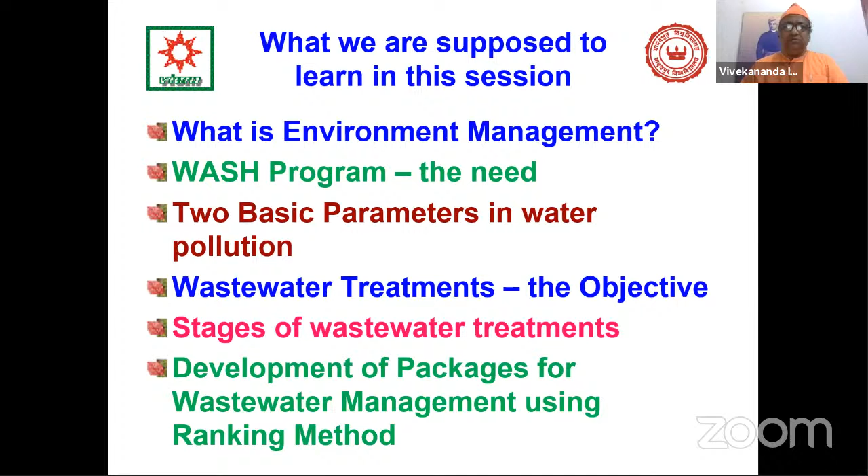So what is environment management? In our webinar internship program, one part is environment management, one part is safety, one part is health. So this is just an introduction.

Man is forced to preserve the environment with the help of science and through legislation, both for his own survival and for the good of the planet in which he lives. Science proposes to educate man on the method of keeping environment clean by reducing pollution, cleaning the effluents, recycling of non-biodegradable products, and looking for cleaner technology. Legislation imposes standards to be maintained and imposes penalty for any violation.

So basically there are two aspects. That's why we specifically used two colors: reducing pollution, cleaning effluents, recycling non-biodegradable products, and looking for cleaner technology are the four avenues where we should use science and technology. Legislation is where we should impose administrative issues, which we will discuss.

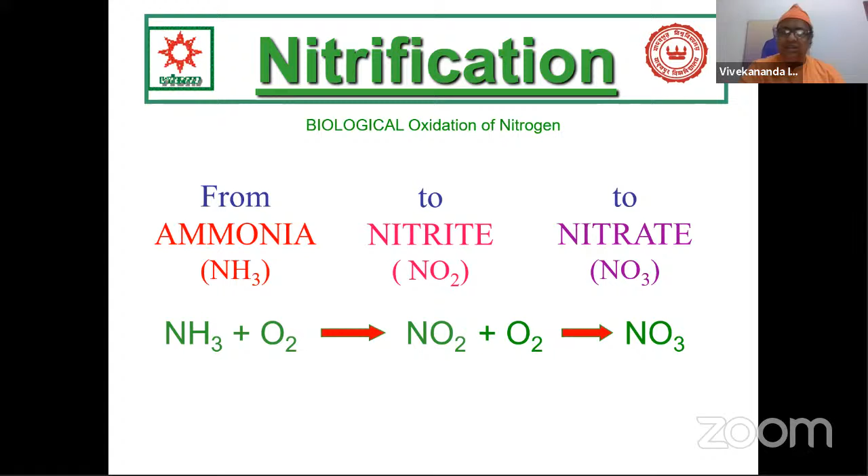Also, whatever the body contains, the ammonia, that ammonia also requires oxygen. This is actually a biochemical reaction. Those who have studied chemistry or chemical engineering have seen that otherwise this reaction will not proceed. The ammonia and oxygen will react either using some catalyst or using some bacteria. That is the slow biochemical process we are considering here.

So this is the reason for DO analysis, dissolved oxygen analysis. This is used in BOD analysis. BOD is known as biological or biochemical oxygen demand. Why is BOD, that biochemical oxygen demand, an essential parameter? I told you we will discuss two parameters: one is DO, the other is BOD.

There are several treatment processes, and basically the goal for all such treatment processes is to reduce BOD to the desired level as specified by the CPCB, the Central Pollution Control Board, which is BOD 30 or less. That is if you discharge it to inland surface water. So that is the standard limit for that.

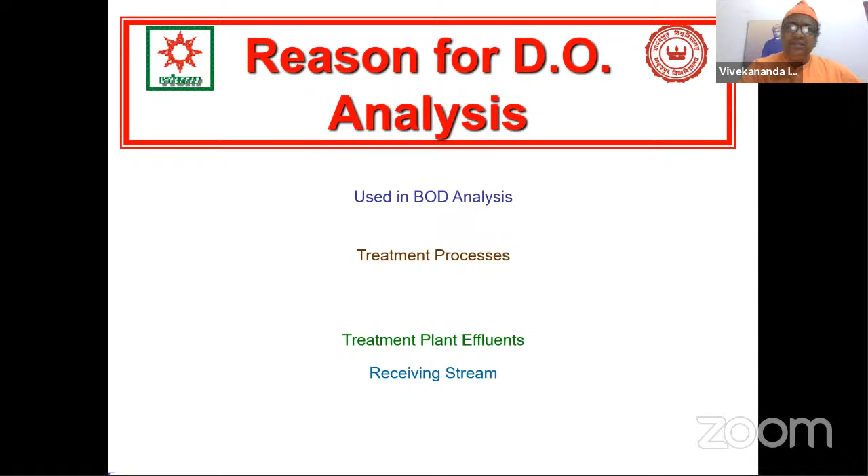Naturally, for treatment plant effluents and also receiving streams, everywhere we have to analyze DO. So unless we know the procedure of DO analysis, we cannot develop the package. This is the precondition for studying this particular topic of my lecture.

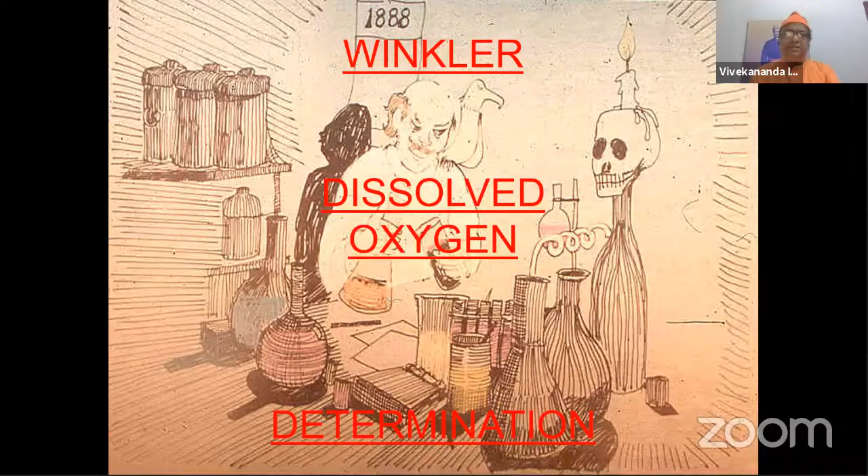Now this is Winkler modification. Winkler did it. Winkler was a chemist in 1888. Winkler found that if you want to find dissolved oxygen in wastewater, the oxygen is actually taken by the biomass, but you have to fix oxygen at certain points, and that's why he used azide.

This is a cartoon showing the nitrite present there, and this is the azide. So as if azide is fighting with nitrite, azide destroys nitrite. That means we have to use sodium or potassium azide for this determination. Sodium or potassium azide is highly reactive, and that's why it is highly explosive.

When my students work in the laboratory, I always caution them that they should be very careful regarding the use of azide, because that may cause explosion. So that is the case.

Now this is the procedure for BOD analysis, the DO analysis. From DO analysis, we have to find out BOD. This is the typical BOD bottle. Each BOD bottle has a unique number, so you can list that number in your record book where you keep the record of your investigation, so it will not mix up with other work, because all these things have to be incubated in a particular incubator known as the BOD incubator. After filling up with wastewater or whatever water whose DO you have to determine...

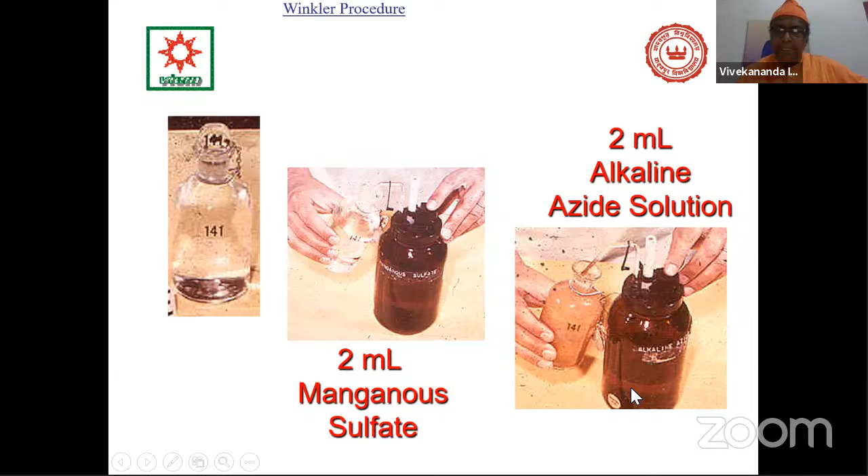Then you have to put 2 milliliters of manganous sulfate and 2 milliliters of alkaline azide solution, and then put the stopper. Don't put in too little, because if you put the stopper with around 2 to 3 milliliters of water short, that water will overflow, meaning it will be wasted. So in the BOD calculation we take this into account. You have to fill it full, put the stopper, mix well, and then, if there is oxygen, the floc will form like this.

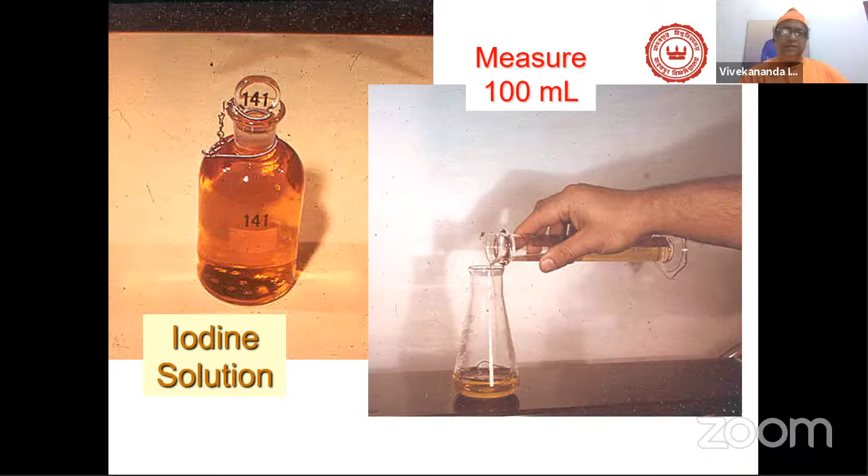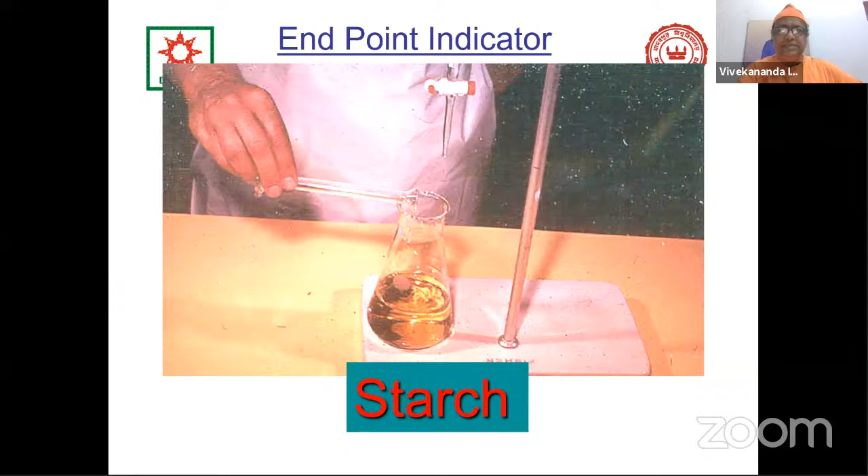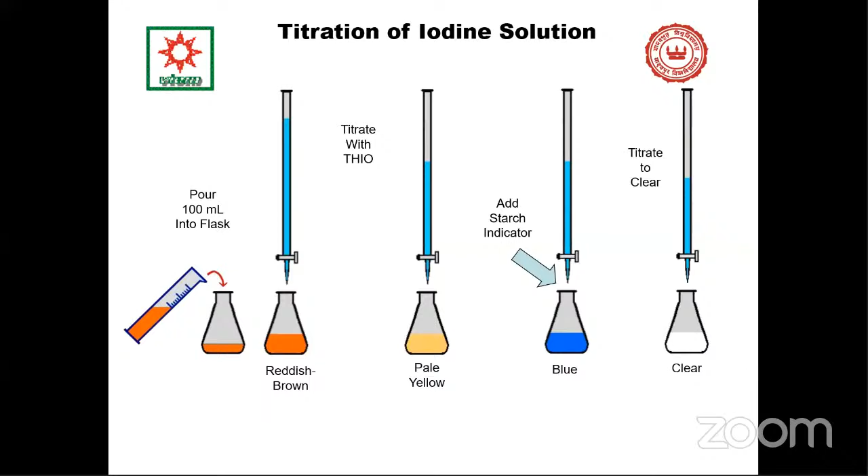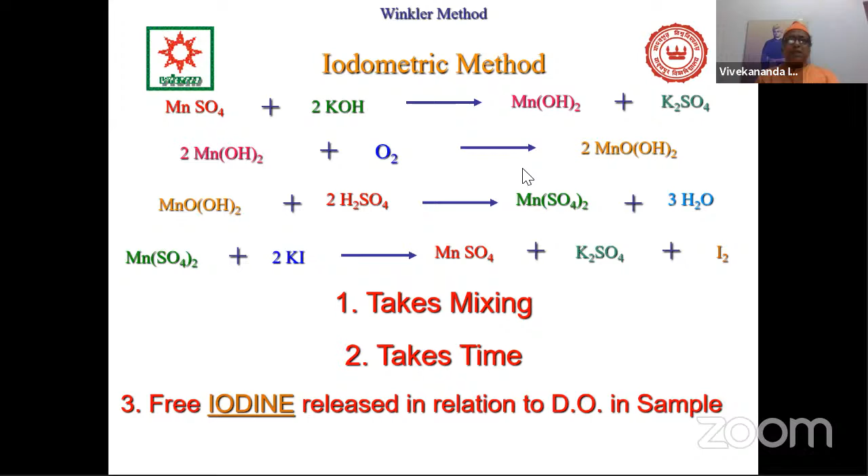So we can't hear you. Am I audible? I hope I am audible. Hope I am audible, isn't it?

So this is the iodometric method. The reactions and other things are given, so accordingly the reaction will take place. Please don't miss the endpoint, because if you add one or two drops extra, and generally we dilute the solution, whatever factor you use for dilution will be multiplied with that error. So if you make a 1% error and multiply by a dilution factor of say 30, your error will be 30%, just for a 1% error. So you should be very cautious regarding this.

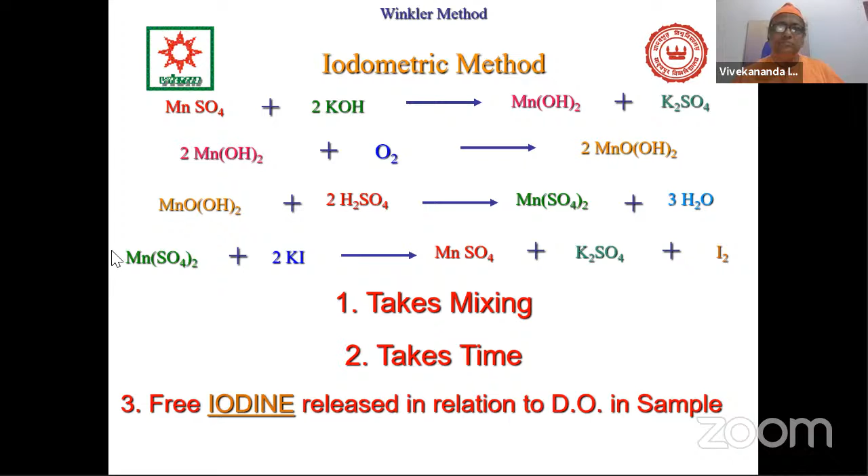Now what is BOD? It is biochemical oxygen demand, as I already told you. In India we prefer 3 days at 27 degrees, but the international convention is 5 days at 20 degrees. The idea is that if you incubate using an incubator, you need a BOD incubator. The BOD incubator operates such that it mostly has a half degree cutoff, meaning if it is 20.5, the machine will cut off.

So all these things will be there: organics, ammonia, bacteria, and we have to fill it up with dilution water and then measure the DO concentration. Nitrification may take place, but that actually happens after 8 days. So if you take BOD3 or BOD5, nitrification will not be a problem.

And then how do we determine BOD? It's the DO at day 0 minus the DO at day 5, and that is BOD5.

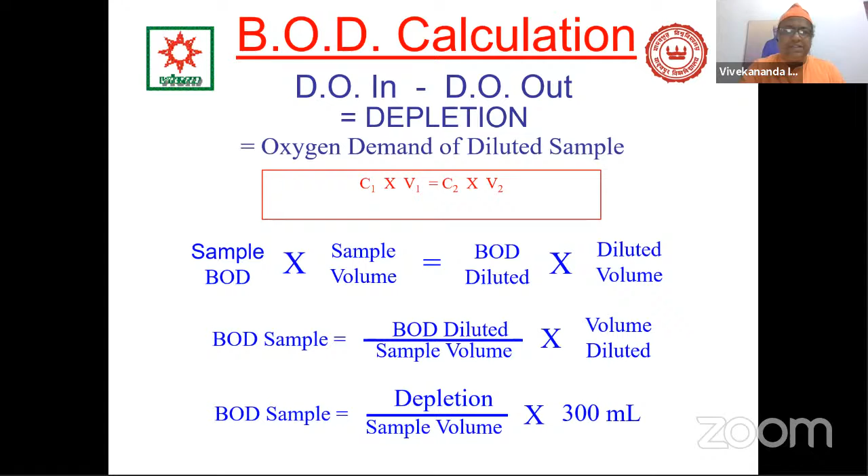This is the calculation for the DO depletion by sample volume into 300 milliliters, so that will be the pure calculation.

Now I have completed some parts of my presentation. Now let us come to the actual topic.

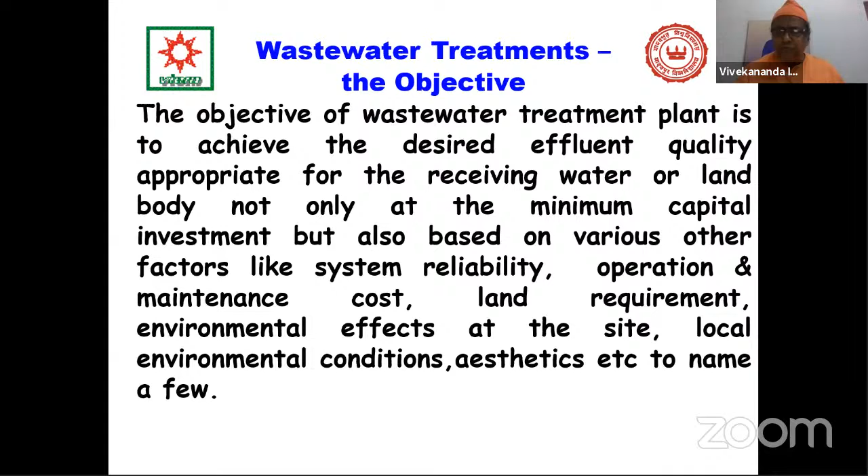The objective of a wastewater treatment plant is to achieve the desired effluent quality appropriate for the receiving water body, not only at minimum investment but also based on various factors like system reliability, operation and maintenance cost, land requirement, environmental effects at the site, local environmental conditions, aesthetics, to name a few.

I will show you one treatability case study in this presentation. Selection of technology, what technology you require based on ranking, we will explain that. Then accordingly, what should be your delineation of the treatment system, then design of the actual effluent management treatment.

And then again comes, so this cycle is over, and then again comes the problem identification for the next case. The ultimate goal of wastewater management should be treating effectively, economically, and ecologically.

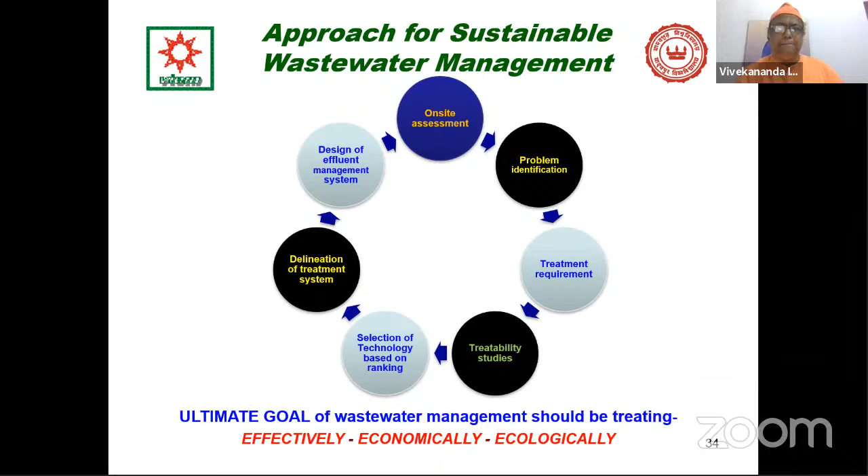Now for wastewater treatment processes, basically there are the preliminary and primary treatment of wastewater. These are basically physical processes, and these processes ultimately can achieve a reduction of BOD up to 30%.

The process includes screening, that means the wastewater is screened to get the suspended materials, for example coconut shells or plastics and other such things. Then grit removal, that means sand, pebbles, etc. If you look at the drain you will find the color of the water, and those heavy sandy particles are removed by sedimentation.

And then ultimately, if it is an industrial type of wastewater treatment, it may be highly acidic or highly alkali oriented, so that's why we need neutralization and equalization. So this is the physical process.

This is followed by the secondary or biological process. This process encompasses all biological treatment processes, both aerobic and anaerobic. For effective treatment of wastewater, various treatment processes are practiced.

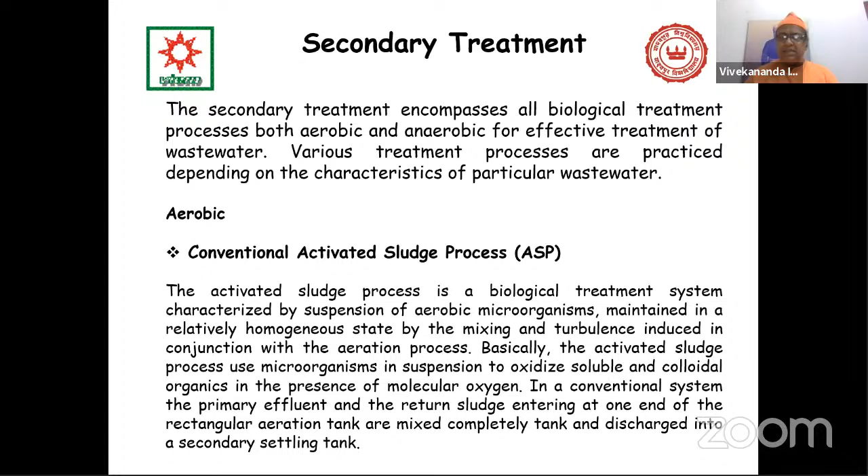So the very basic is the conventional activated sludge process. It is an activated sludge reactor. The reactor contains... let me show you the photo of this.

This is the Bangur sewage treatment plant where we had a lot of work, near, in between Lake Town and Bangur in Kolkata. Here, the number of aerators: this is the primary clarifiers, secondary clarifiers, numbers of aerators, and then ultimately here the activated sludge is being purged, and that takes place in the reaction.

This is one aerator; the wastewater is being dispersed using the aerator so that the oxygenation will be increased and also the treatment efficiency. So this is a type of conventional process.

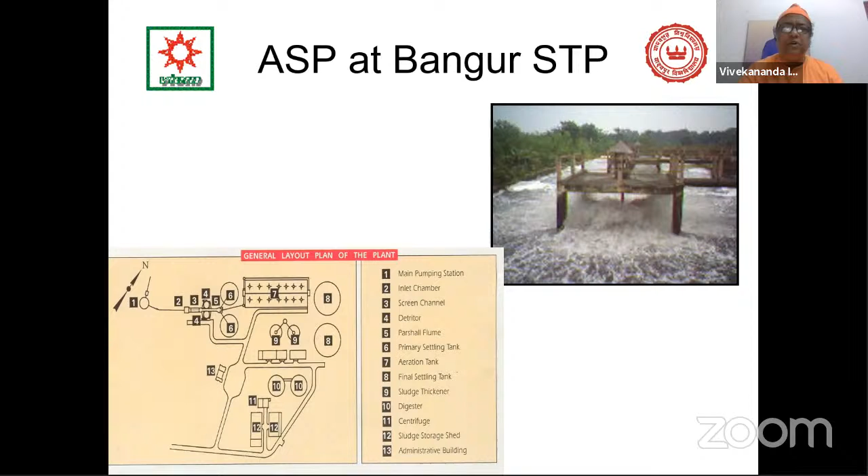Then the extended aeration system. It is almost similar to the activated sludge process. The only difference is there is no primary clarifier and no secondary sludge drying bed. You have seen the earlier flow sheet, there are around 6 to 7 units; here the number of units is reduced, and that is why the space area is reduced. So from that standpoint, for cities this gives a very important success.

But the thing is, in this extended aeration, the aeration is the main thing, and naturally for that the requirement of electrical power will be much more. So that is the disadvantage, but it is a costly process.

The other process is the trickling filter. The trickling filter is basically a trickle bed reactor.

This process is efficient for a small scale plant, but the main problem is if it is operating in temperate countries, the microbial reaction being taken place requires atmospheric temperature of more than 24-25 degrees, otherwise the plant efficiency suffers.

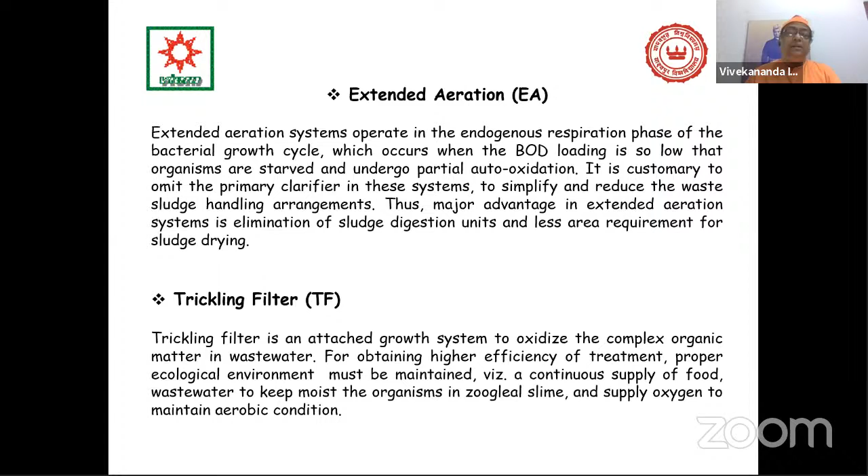So this is the trickling filter. The other is the rotating biological contactors. This is rarely seen in India. The wastewater trough is there, and through that the discs are immersed, and the disc will have circular motion. Because of that circular motion, aeration activities take place. In some types there are two plates as end plates and remaining as supporting plates. This is also a very compact unit, helpful for small scale processes.

So then the anaerobic system. All other systems we discussed till now are aerobic systems. Aerobic system means within presence of oxygen. Anaerobic means in absence of oxygen.

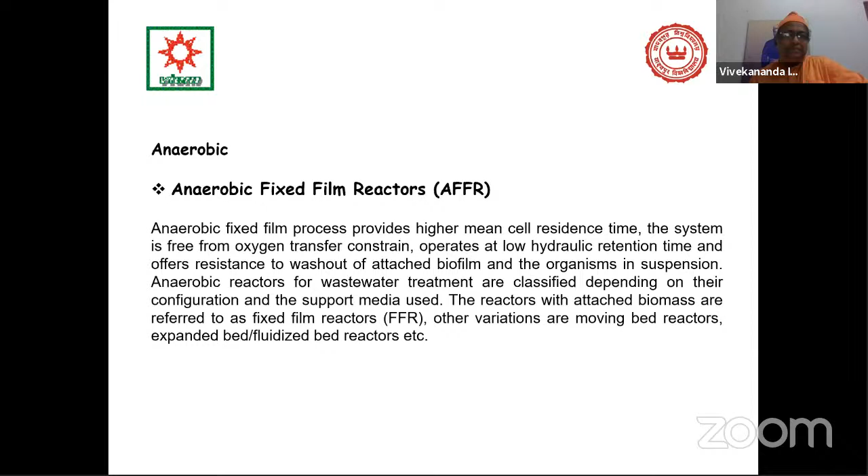Anaerobic fixed film reactors have very low efficiency. But if you have hazardous waste, that can only be destroyed using anaerobic fixed film reactors; otherwise its efficiency is low. Anaerobic reactors for wastewater treatment are classified depending on their configuration and support media used. Reactors with attached biomass are referred to as fixed film reactors. Other variations are moving bed reactors, expanded bed, and fluidized bed reactors, etc.

Then comes the waste stabilization pond. We are discussing this in more detail because it is today's hot topic. This is a series of ponds. The first pond is aerobic, meaning it operates in presence of oxygen, and since it is aerobic, it is a shallow pond with maximum light penetration, maintaining dissolved oxygen level throughout. Detention time is 3 to 5 days, meaning you have to keep wastewater in this pond for 3 to 5 days. Since detention time is short, very little coliform destruction will result.

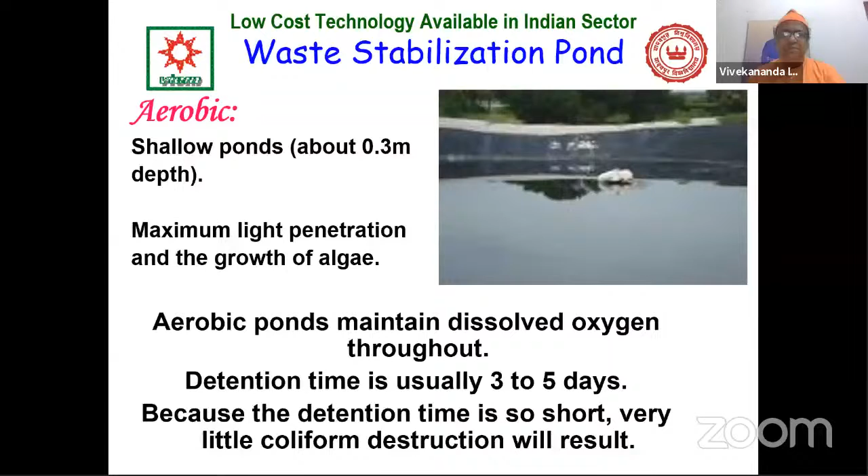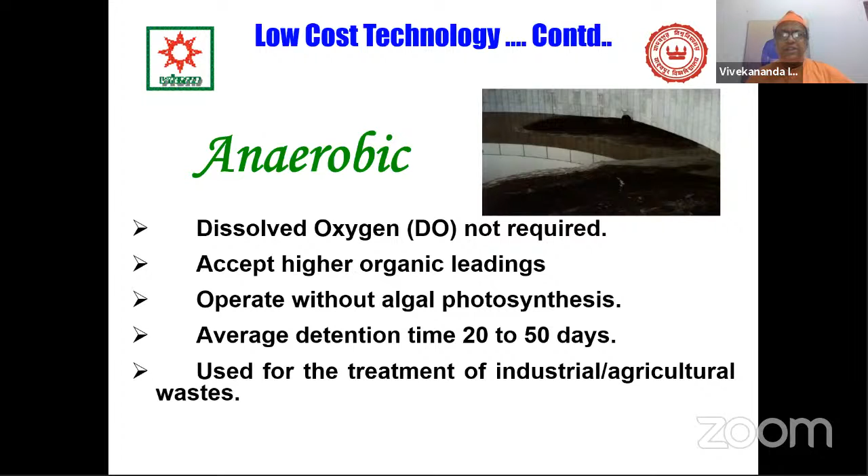It will be followed by an anaerobic pond. This waste stabilization pond is always a series of ponds - first aerobic, then anaerobic, where dissolved oxygen is not required. It can accept higher organic loadings, operates without algal photosynthesis, has an average detention time of 20 to 50 days, and is used for treatment of industrial and agricultural wastes. Then comes the maturation pond.

Then duckweed pond - a small floating aquatic plant belonging to the Lemnaceae family, consisting of 4 genera: Lemna, Spirodela, Wolffia, and Wolffiella. These are the things, and now the duckweed pond characteristics are being given.

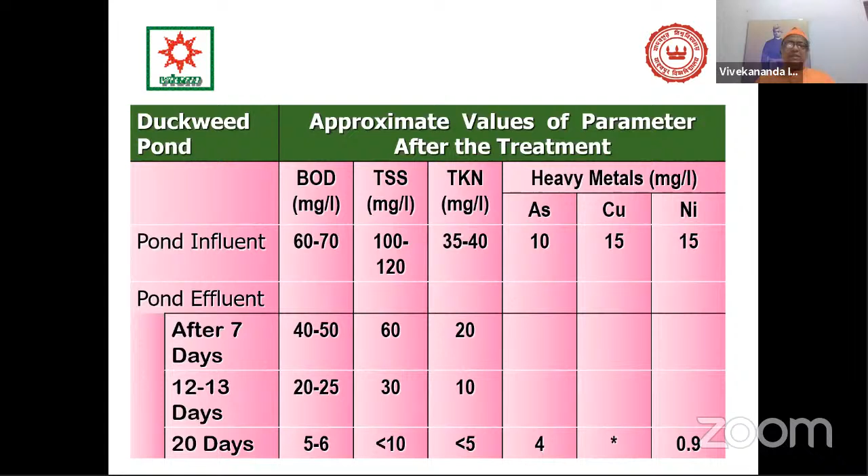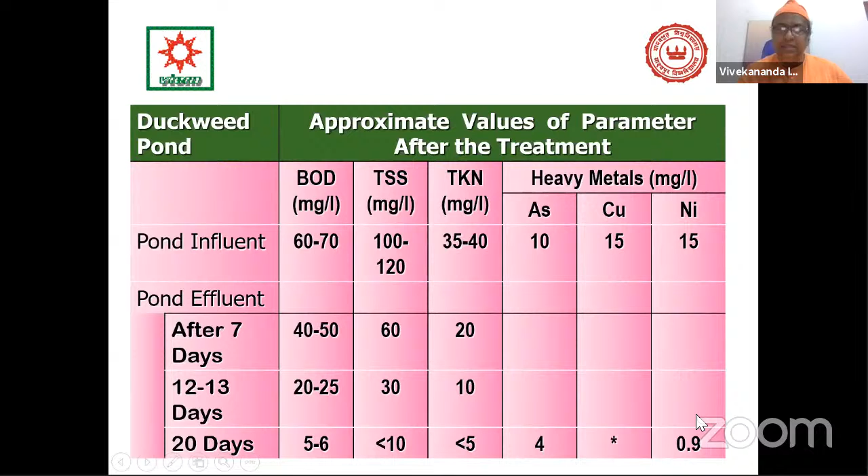The pond influent BOD is 60 to 70, TSS 100 to 120. After 7 days, it will be reduced to 40 to 50. After 12 to 13 days, it will be 20 to 25. And after 20 days, it will be 5 to 6. When it goes beyond 30 days, you can safely discharge into inland surface water. Heavy metals also can be reduced - arsenic from 10 to 4 within 20 days, and nickel from 15 to 0.9. So this is a very efficient system.

Now we are already aware of the concepts of waste treatment and treatment alternatives, how to use particular wastewater treatment processes, where to use what, and where we should not use this. Now the point is, with this concept, we have to identify the basic objective of this package development, which is to identify the parameters. The construction of a treatment plant is a very involved and cost-intensive process. Planning, designing, detailing, drawings, arranging raw materials, actual construction, supervision, commissioning, and operations all demand considerable time, experience, manpower, and finance. It needs reviewing and comparing with other alternatives from time to time to achieve the desired satisfaction level.

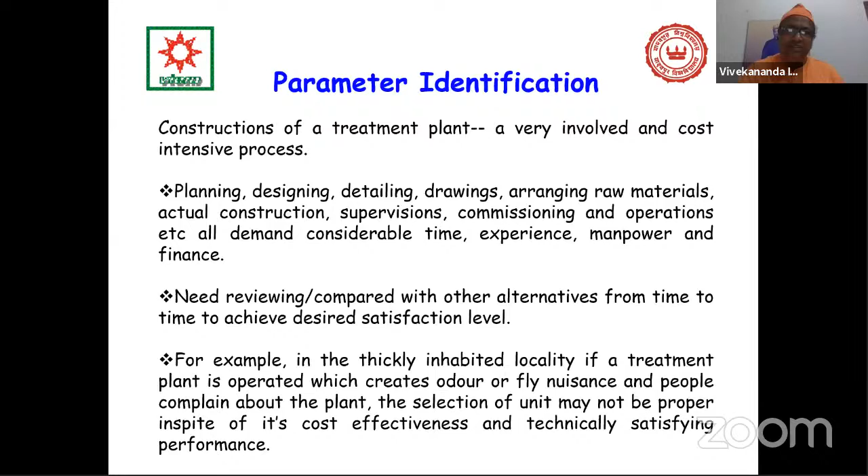Similarly, for suggesting one particular option, one should be very cautious regarding what type of units to use. On this basis, I am showing you the selection of wastewater treatment technology options, known as the methodology used for ranking of wastewater treatment processes. It involves the following steps: identify the alternative treatment processes for meeting the stipulated effluent standards.

Estimate sizes of individual units in the treatment processes. Estimate land, power, and staff requirements for the treatment alternatives. Estimate capital investment and annual operation and maintenance costs. Estimate annual benefits, if any, and calculate net annualized cost. Identify the attributes for ranking of alternatives. Out of a total score of 1,000, assign scores to individual parameters through pairwise comparison.

For development of the evaluation basis for a parameter in the attribute, develop technology acceptability curves. This technology acceptability curve is a very important issue. Calculate the technology acceptability index for each parameter. Calculate the score for the parameter by multiplying the technology acceptability index by the weight, that is the maximum score for the parameter. Add the scores for the individual alternatives and rank the alternatives.

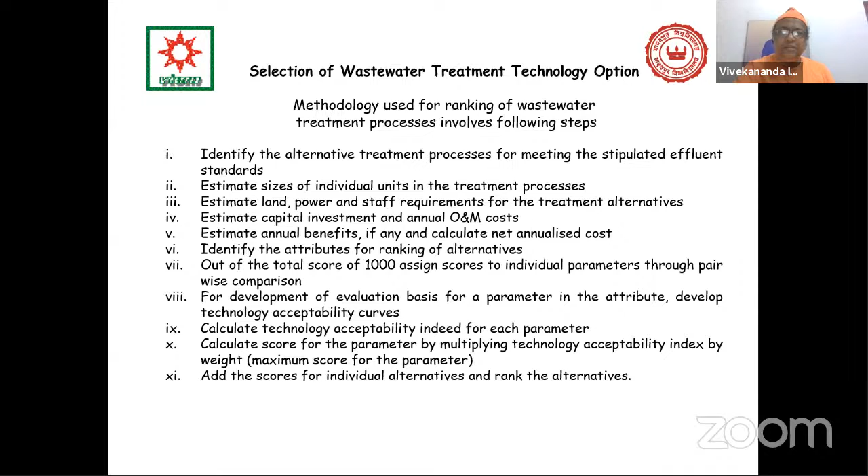It may seem a little bit paradoxical, but in the subsequent slides it will become very clear. For example, what types of removal do we require from the wastewater? Phosphorus removal, nitrogen removal, coliform removal, helminth removal, virus removal, mosquito nuisance, all these things. First of all, the removals, and the measurement is the percentage removal. The wastewater has a certain percentage of phosphorus and you have to remove it. How is that removal achieved? Using a particular criteria, using a particular treatment process, say activated sludge process or waste stabilization pond, or so and so processes, and how it performs. So that is the case.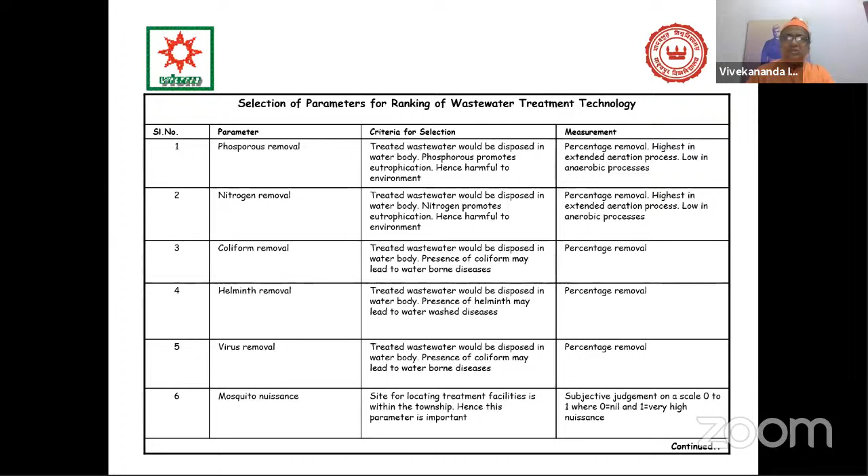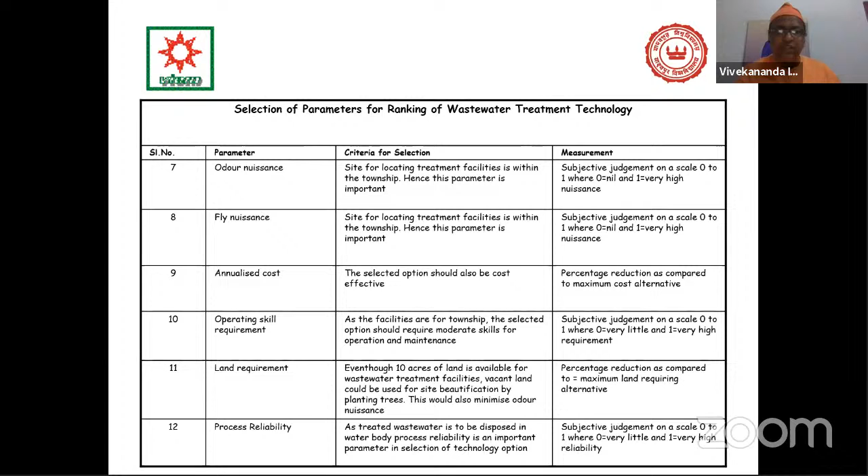Regarding mosquito nuisance, all such nuisances are subjective, measured on a scale of 0 to 1. If it is 0, that means there is absolutely no problem, and 1 means it is very high nuisance. So that is the other process. Now with this, say odor nuisance, fly nuisance, annualized cost, operating skill requirement, land requirement, process reliability, all such types are there, and accordingly we have the subjective measurement or percentage removal. With the help of this, we actually did it for the ASP.

This particular slide gives you the relative merits and demerits. This is a fixed thing, true for all such comparisons. For example, if you are using the activated sludge process, if you are using the extended aeration system, if you are using a trickling filter, if you are using a stabilization pond, if you are using RBC or AFFR.

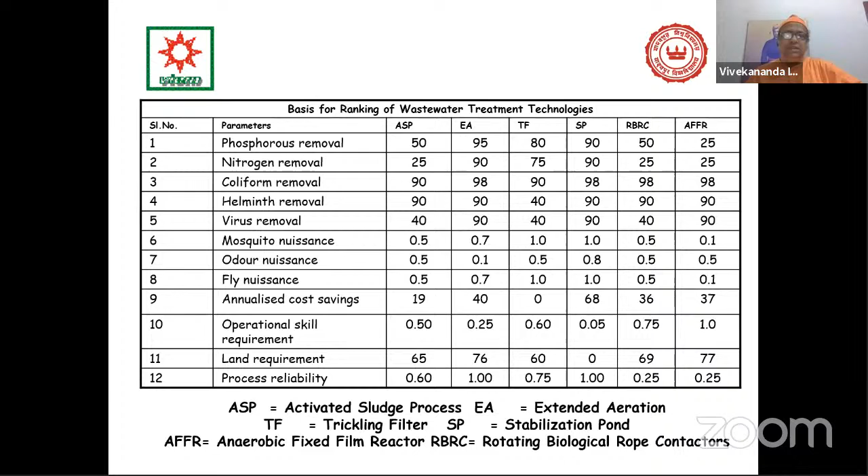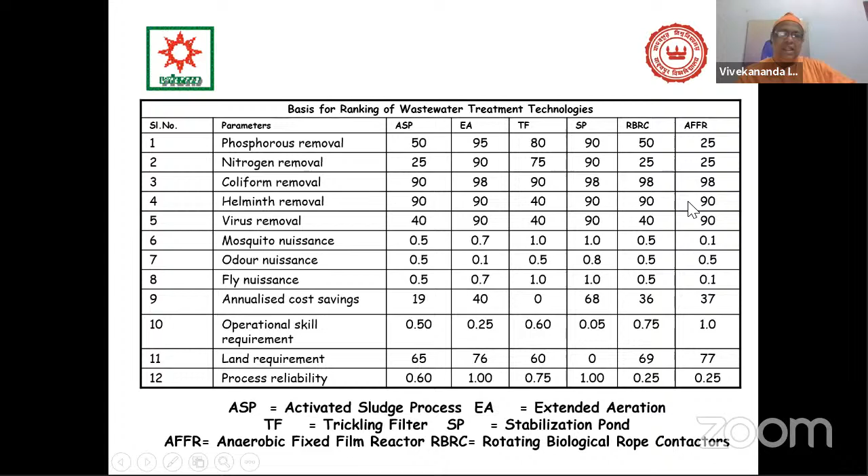All processes we have explained earlier. So what should be the removal, what should be the parameter values? You see phosphorus removal in ASP is 50%, extended aeration is 95%, very high. In extended aeration systems, all the parameters are very high. Trickling filter is a bit medium, stabilization pond values are also good. RBC gives mediocre values, AFFR gives very low values. So this is the matrix, and accordingly one has to make the choice.

As already stated, on a scale of 100, you have to compare like this.

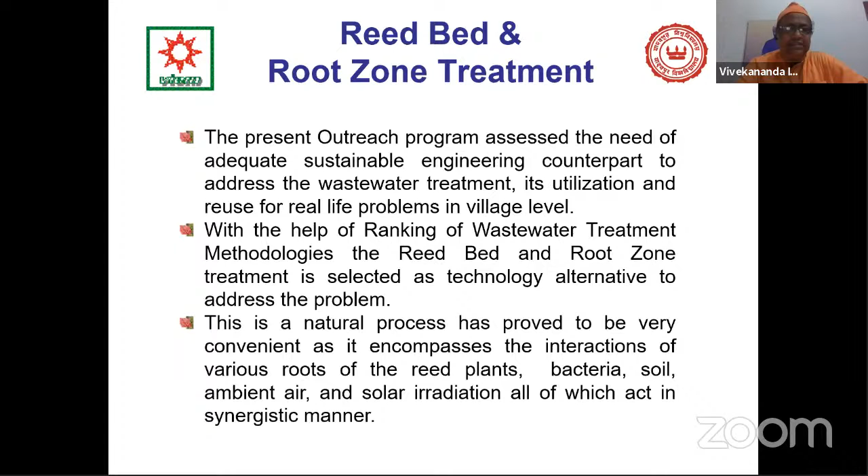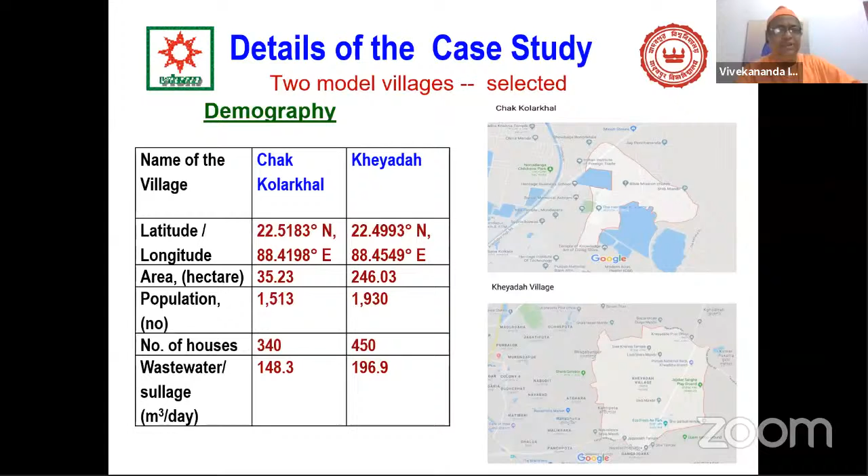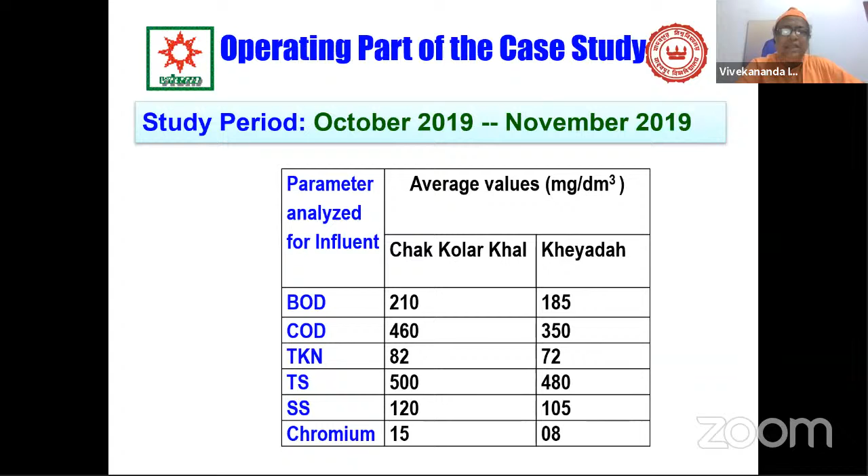One is Chak Kolarkhal, just beside our Heritage Institute of Technology. Another is Kheyadah. These are the demographic figures of these places. This is the study period, from October to November last year. We analyzed BOD, COD, TKN (total kjeldahl nitrogen), total solids, suspended solids, and chromium. Why chromium? Because that area is full of tanneries, that's why we estimated chromium.

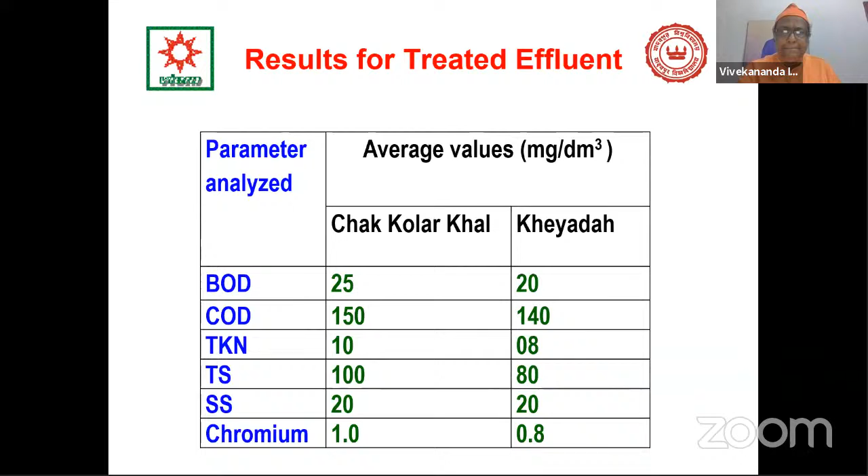Using this pilot plant, we obtained results for the treated effluent, and you can see all the figures come within the standard limits. After treatment using this pilot plant, the values come below standard, except in Kheyadah where chromium is high. This is the discussion on this particular case study.

A combined flow system design was developed based on the pilot study using floating macrophytes, namely Canna indica—what we call in Bengali Kolabati phool, or Hogla Potti. The hydraulic retention time and the area of the unit were calculated to be 5 to 6 days and 1.2 hectares respectively for both villages.

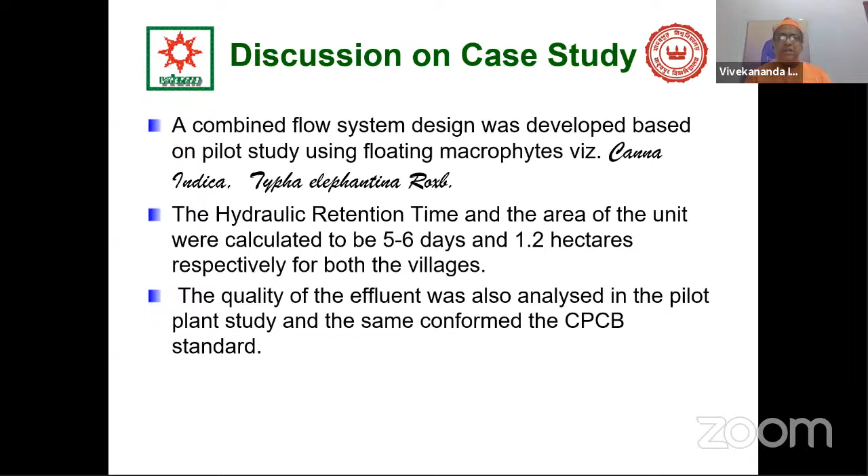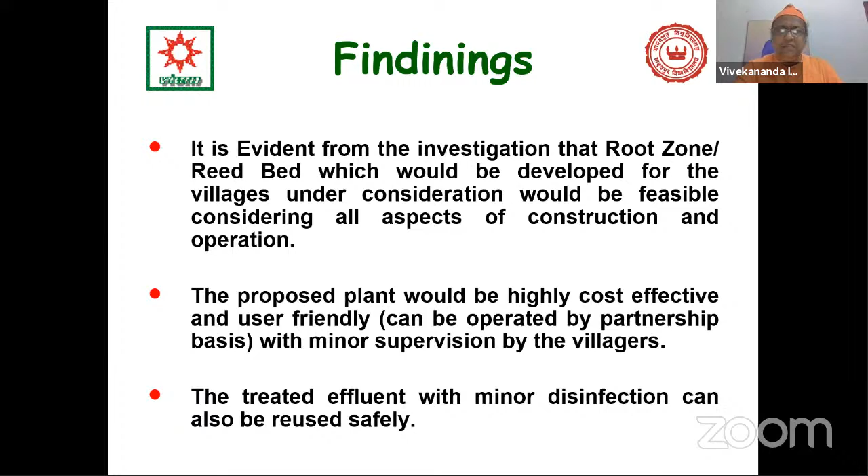The quality of the effluent was also analyzed in the pilot plant study, and it conformed to the CPCB standard. It is evident from the investigation that root zone reed bed treatment, if developed for these villages, would be feasible considering all aspects of construction and operation. The proposed plant would be highly cost-effective and user-friendly, operable on a partnership basis with minor supervision by the villagers. The treated effluent, with minor disinfection, can also be safely reused.

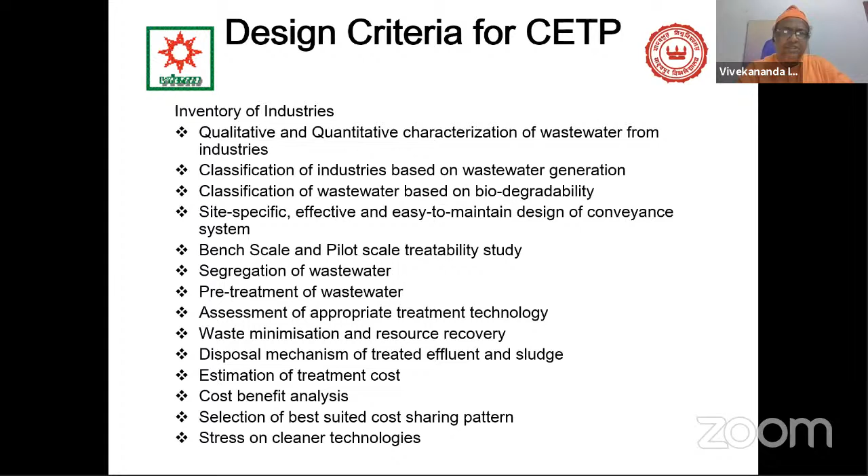This is the design of a CETP, common effluent treatment plant. It requires lots of parameters: inventory, qualitative and quantitative characterization, classification of industries, classification of wastewater based on biodegradability, site-specific and easy-to-maintain design of conveyance systems, bench scale and pilot scale treatability studies, segregation of wastewater, pre-treatment assessment, waste minimization, disposal mechanism, estimation of treatment cost, cost-benefit analysis, selection of best suited cost-sharing pattern, and stress on cleaner technologies.

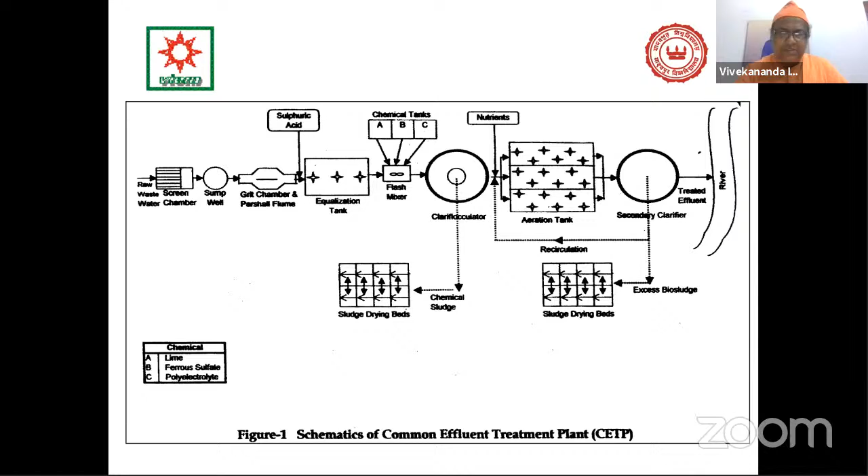This is a typical flow diagram of this common effluent treatment plant. It is a type of secondary treatment plant. The only difference is that there will be an equalization chamber and then the aeration tank—this is basically an activated sludge process. This is the secondary clarifier, and these are the sludge drying beds. So there are two sludge drying beds after the two clarifiers, primary and secondary. So this is basically a common effluent treatment plant based on the activated sludge process, which we discussed earlier.

There is one common effluent treatment plant where I was involved. I am still on their committee, and almost every year—this year is the exception—they call me for their meeting to analyze the performance. This is at Pali, a place with a lot of industries like Sanganeri print, what we Bengali people call Jaipur print, the Sanganeri print—small textile industries. This is a conglomeration of such industries, and that's why the CETP was erected. The design was done by NEERI, and the fabrication part was done using the United Nations Development Fund. So I was involved in that process.

So this is basically an approach on how to design the packages, if you are given the job to develop a wastewater treatment process. This is a very basic approach that I could share with you.

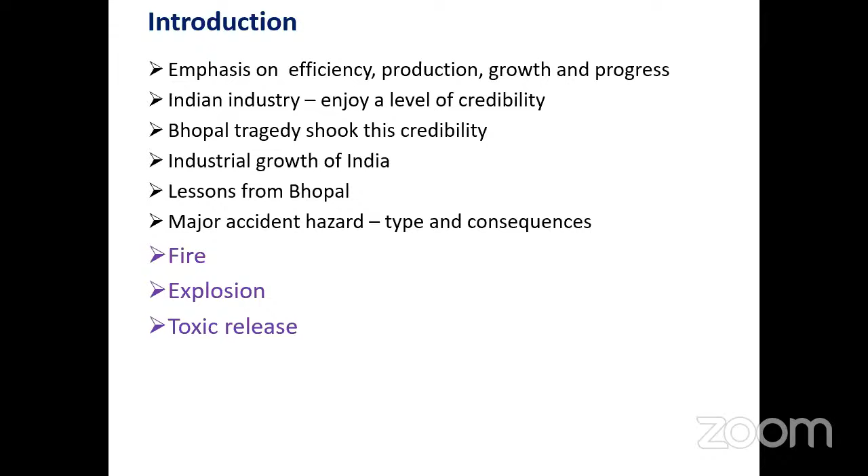Major accident hazard types are fire, explosion, and toxic release. In the case of fire, here are some examples - the chemicals, consequence, death and injury, and place of occurrence. Methane caused 136 deaths.

LPG BLEVE in France in 1966, LNG causing 40 deaths in USA, methane causing 52 deaths in Santa Cruz, Mexico, leather and synthetic bag manufacturing materials causing 43 deaths in Delhi on 8 December last year, and crude oil in Bombay High when a tanker collided with the Bombay High basin - 10 people died, many were injured.

Bombay High in India on 7 July 2005, and a petrol storage tank in Jaipur holding more than 80,000 kiloliters caught fire. 12 people died and more than 100 people were injured in 2009.

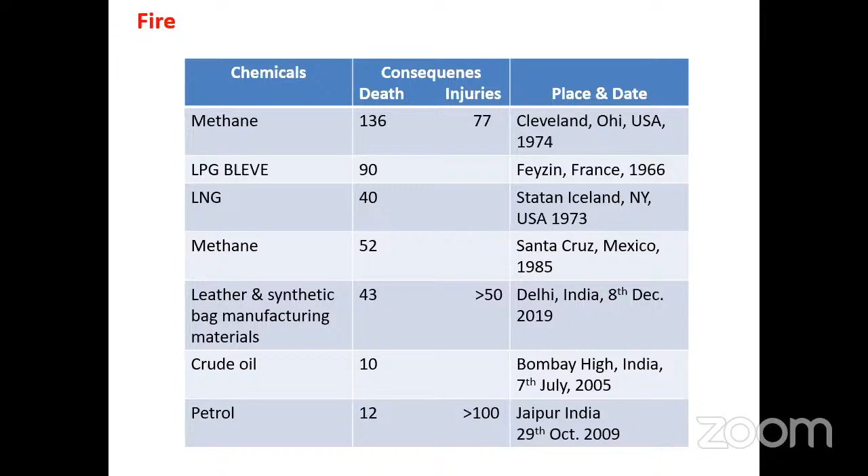In the case of explosion, when inflammable materials released during an accident mix with air to form an explosive mixture at a certain specified concentration, and this mixture is ignited, there is an explosion. Explosions are characterized by shock waves and can result in structural damage of buildings, flying objects, people being knocked down or buried under collapsed structures, and so on.

Explosion can take place with the following categories of materials: gases like LPG, cyclohexane; dust like milk powder; confined vapor cloud explosion within a vessel or pipe work; unconfined vapor cloud, where released vapor forms a vapor cloud in air; and lastly, the boiling liquid expanding vapor explosion, that is BLEVE.

It is a situation where an inflammable liquid is fired, vapor is released and expands, gets ignited, and then explodes.

Then toxic release: large quantities of toxic chemical released into the atmosphere by accident can cause serious injury or death to a large population. The danger or harm from this release depends upon the quantity released, physical properties of the material released, toxicity of the material, and factors like wind velocity, direction, and humidity.

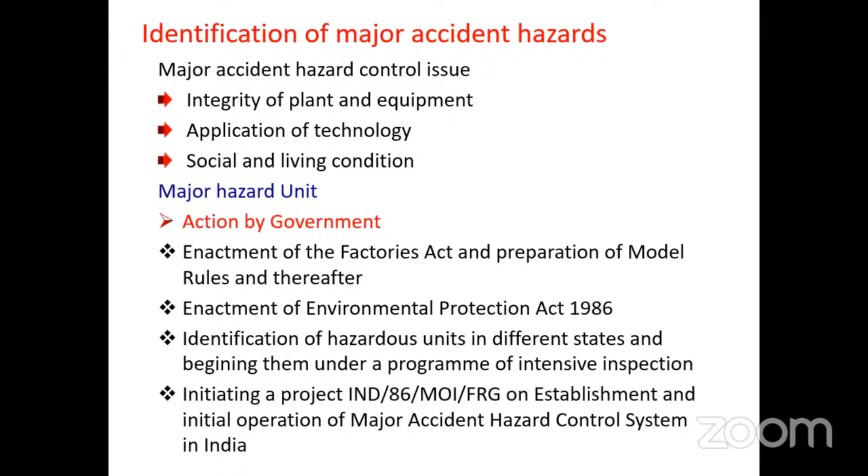IND/86/MOI/FRG, to establish and initiate operation of a major accident hazard control system in India. Before that, this was not there. So what is the purpose?

The purpose is setting up a major accident hazard control advisory division or cell in central government as well as in local government, and training of the inspection or advisory staff so that they can visit the factory and educate people once they get the training.

Setting up a nationwide information system is also important. This system is established but not in a proper fashion, because if an accident takes place at place X, companies always hide the information. The government is trying, level by level, to set up a nationwide information system, so that when a near miss or accident takes place, other industries in similar situations can be alert. But this system is not yet a very fruitful arrangement by the government.

The preparation of guidance notes, manuals, and training manuals, along with training of key personnel, is important. Expansion of factory inspection service and enhancing their capability through setting up laboratories and training of inspectors is needed. There should also be a series of meetings and consultations with industry employers, associations, and government officials regarding the enforcement of rules and regulations.

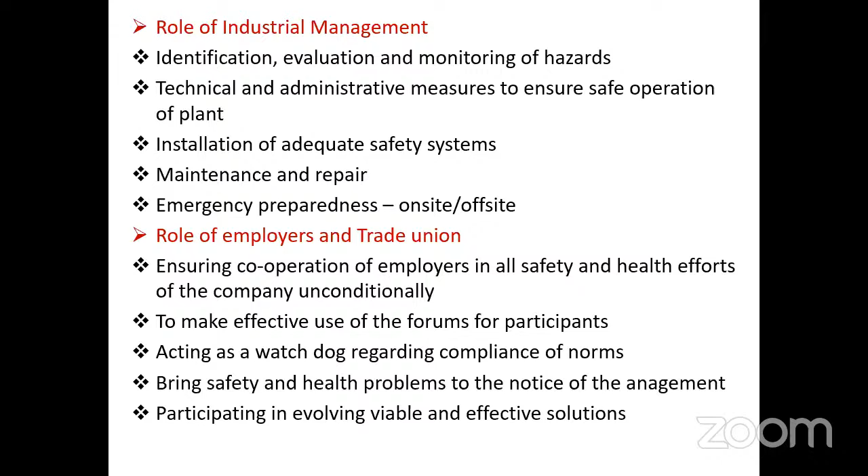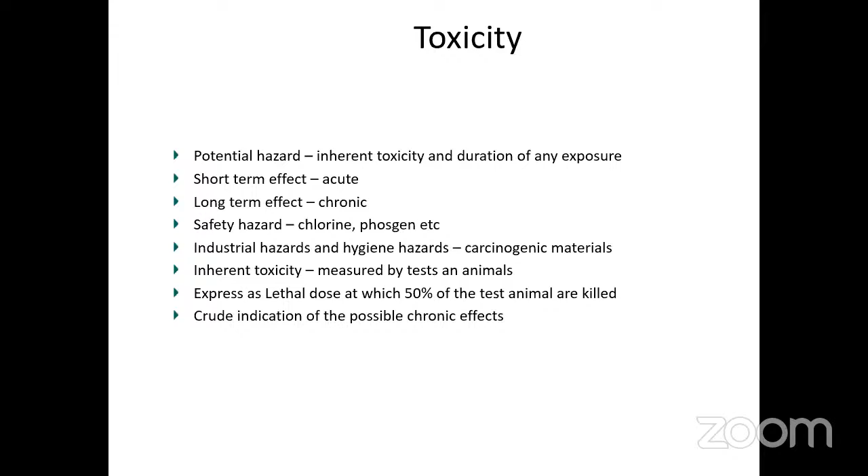This toxicant can be introduced into the body by ingestion, inhalation, injection, and dermal absorption. First is the mouth - how can we control this? Inform people of rules on eating, drinking, and smoking so it can be avoided. Inhalation is through the mouth or nose - proper ventilation, respirator hoods, and other personal protective equipment should always be worn in a danger zone or industry. Injection means cuts in the skin - proper protective clothing must be worn, particularly for those working in the industry in this type of zone. Dermal absorption is also through the skin, so proper protective clothing is necessary to avoid this.

Now some LD50 values, measured in milligrams per kg. All chemicals used in industry are toxic to some extent, depending upon the amount you are absorbing and the gases you are taking in through inhalation. So all chemicals are toxic, however small the amount. Table salt is also dangerous at 3000 milligram per kg. Potassium cyanide is 10 milligram per kg, tetraethyl lead 35 milligram per kg, lead 100 milligram per kg, DDT 150 milligram per kg, and aspirin tablets, which are taken for health purposes, is 1500 milligram per kg.

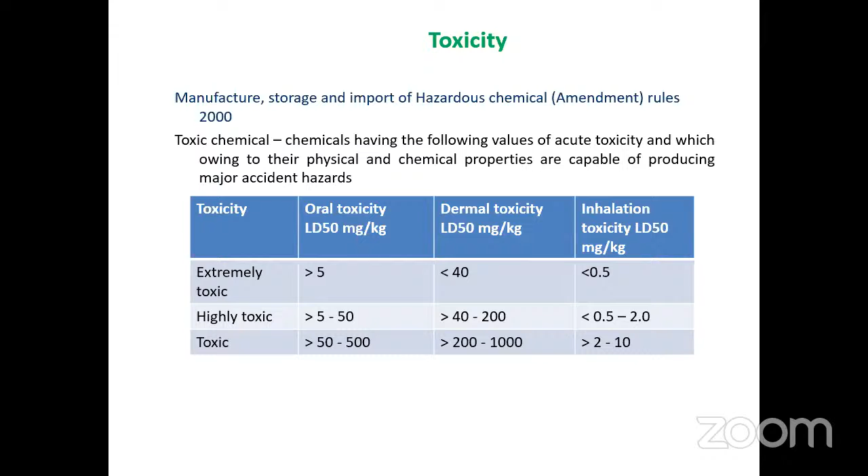Now I will briefly explain what is hazard. Hazard is basically an Arabic word associated with games such as golf or billiard, but today it is usually associated with harm or loss. So a physical situation with a potential for human injury, damage to property, damage to the environment, or some combination of this is the hazard.

So hazard must be a system having in general case three basic kinds of components: one is source component, one or more receptors, together with one or more transmission paths. The source has a potential for injury to people or damage to property or environment.

The receptor has a potential for sustaining injury or damage, should the potential harm of the source be realized. A transmission path is a medium by which or through which a harm is transmitted from the source to the receptor, and simultaneously attenuated. The source is important.

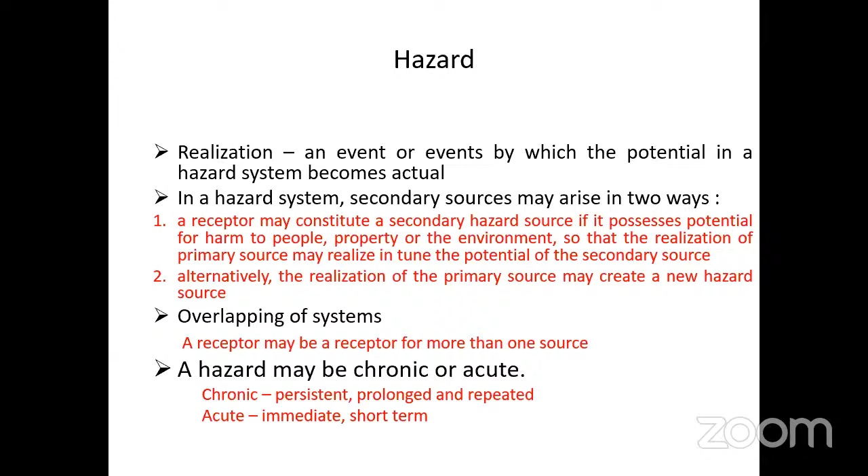There is a possibility of overlapping of the system. There is a possibility that a hazard may be chronic or acute. Chronic is characterized by persistence, prolonged and repeated effects. Acute may be immediate and very short-term effect.

Another important term is risk, which is the likelihood of a specified undesirable event occurring within a specific period or in specific circumstances. So we can define risk as a frequency or probability. Frequency is the number of specific events occurring in a unit time. Probability is a number on a scale from 0 to 1 which expresses the likelihood of an event.

So frequency you can calculate, and probability level also you can calculate. Say in a hill or lower level of the Himalaya, a lot of people are staying there. There is a possibility of stones falling from the top, which can damage the people, damage their room, damage their livelihood, or even cause death. So in that condition, you can calculate yearly how many times that type of event occurs and how many people die - you can calculate frequency and also probability.

Now our objective is assessment of the things, that is to quantify the evaluation of the likelihood of the undesirable event - that is, likelihood of harm being caused together with the value of judgment made concerning the significance of the result. So if we identify whatever possibility there is for the risk, we can apply our judgment to rectify that event so it should not happen.

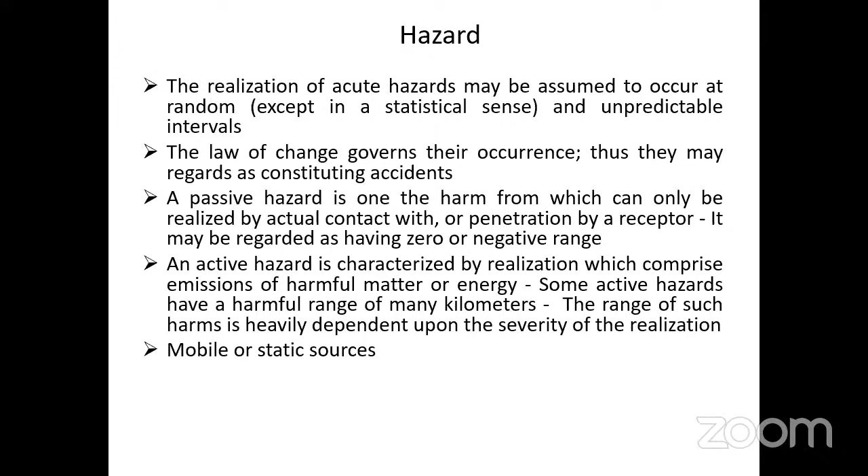Now, what is the nature of the receptor? Receptor is an animate receptor, that is, people, flora, fauna, etc., or an inanimate receptor, building or process equipment, which may be mobile or static, on-site or off-site. On-site means within the plant, off-site means outside the plant.

What is the characteristic? The magnitude and the likelihood of realization. Experience shows that smaller realizations are more likely to occur than larger ones. Small accidents always take place more often than large accidents.

Now, how to define an accident? According to Suchman in 1961, an event can be classified as an accident if it is unexpected, unavoidable, and unintended. He proposed the basic characteristics for an accident: degree of expectedness, degree of avoidability, and degree of intention.

Secondary characteristics include degree of warning. You are getting warning, but you are not careful about that. Also degree of occurrence, duration of occurrence — how much duration it takes place — degree of negligence, and degree of misjudgment.

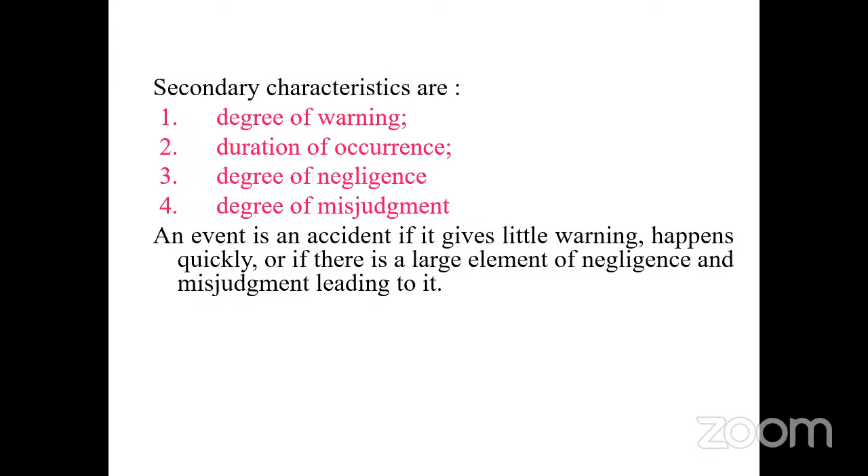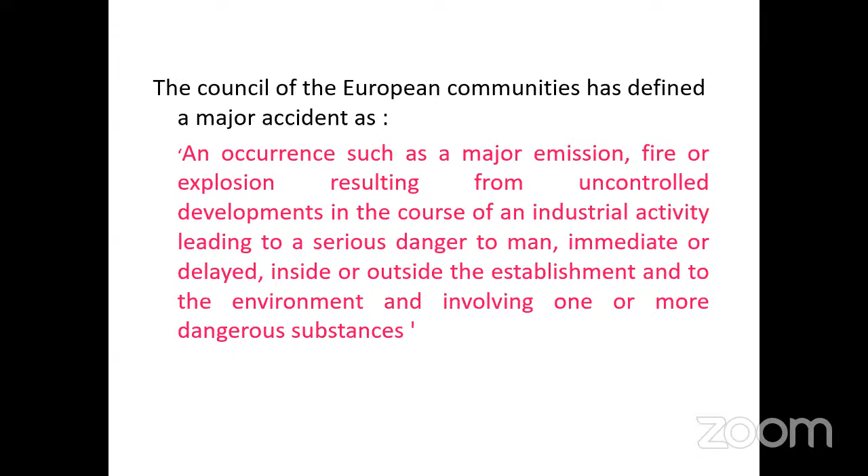Now, the European Community defined a major accident as an occurrence such as major emission, fire, or explosion resulting from uncontrolled development in the course of an industrial activity, leading to serious damage or danger to man, immediately or delayed, inside or outside the establishment, and to the environment, involving one or more dangerous substances. That is, in the case of a major accident, one or more dangerous substances always come out from the system.

Now, if you think of chemical industries, the chances of accident due to equipment failure is 29.2%, operational failure is 20.9%, inadequate material evaluation is 15.7%, chemical process problem is 10.9%, and material movement problem is 9%. Material movement means if in a reactor you are supposed to introduce A, then B, then C, then D, but by mistake you introduce B, then C, then D, then A — that is a material movement problem.

Other causes include ineffective loss prevention programs, plant site problems, inadequate plant layout, and structures not conforming with use requirements — whatever the structure is meant for. A similar accident occurred in 1985 in Delhi at Shriram Chemicals, when the oleum storage tank deteriorated due to structural failure, and a lot of oleum was released from it.

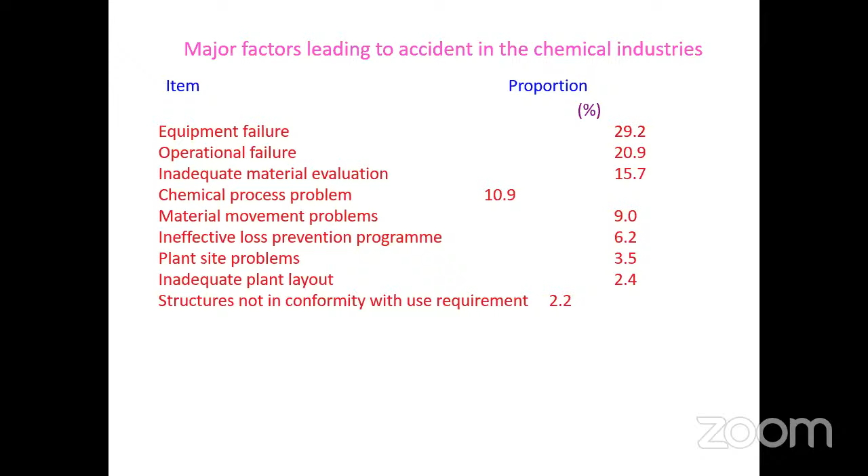Now I will discuss a little bit about fire. In the case of industries, the leading cause of industrial fire, number one, is electrical fire. Number two is smoking materials. Other causes include friction, overheated material, burner flames, combustion sparks, spontaneous ignition, cutting and welding, fire from nearby facilities, sparks, chemical action, lightning, or molten substances.

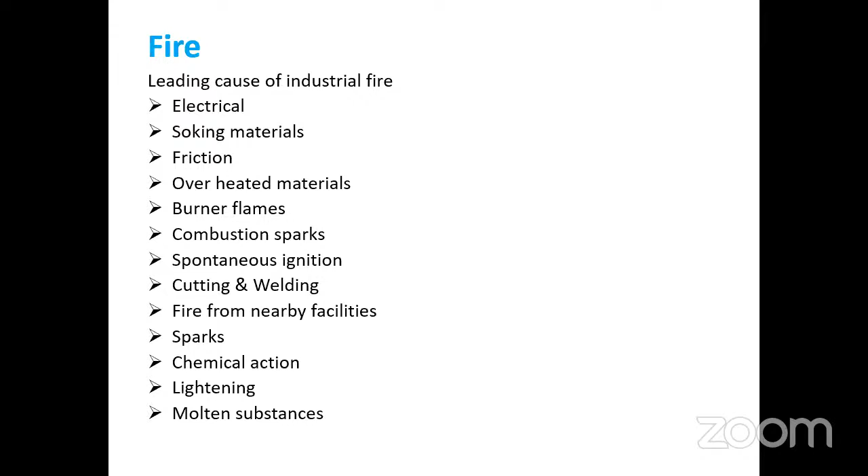For any fire, three things are required: one is an oxidizer, another is fuel, and another is an ignition source. The oxidizer may be a liquid or gas like oxygen, fluorine, chlorine, hydrogen peroxide, nitric acid, perchloric acid, etc., or a solid like metal peroxide or ammonium nitrate. So one oxidizer must be required, which may be liquid, gas, or solid. Fuel must also be there — liquid fuels like gasoline, acetone, ether, pentane.

Solid fuels like plastic, wood dust, fibers, metal particles, etc. Gaseous fuels like acetylene, propane, carbon monoxide, hydrogen, etc. And there should be an ignition source — sparks, flames, static electricity, heat, etc. Unless all three things are complete, the fire triangle is complete, you cannot get any fire anywhere. So one thing is oxidizer, one thing is fuel, one thing is ignition source — all three are simultaneously required to get a fire.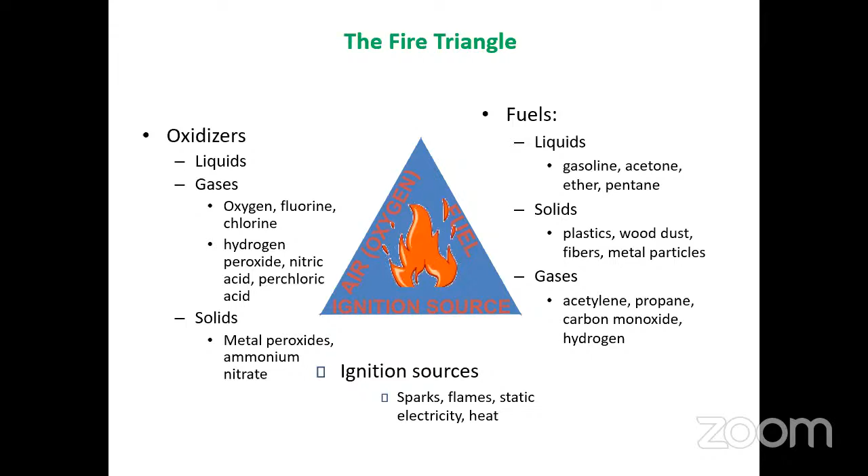In fire, there are 4 classes of fire. Class A is ordinary combustion of fibrous material such as wood, paper, cloth, rubber, and some plastic. Class B is flammable or combustible liquid such as gasoline, kerosene, paint thinner, propane, etc. Class C fire is energized electrical equipment such as appliances, switches, panel boxes, power tools, etc. And class D material is certain combustible metals such as magnesium, titanium, potassium, sodium.

For different classes of fire, different types of fire extinguishers are available. For that, you can apply that type of fire extinguisher. Not all fire extinguishers are applicable for all the systems. For combustible materials, class B material, if you use water, then due to density difference, kerosene or gasoline will come on top of the water level, and then they will again catch fire.

In the case of liquid fire, liquid fuel is always defined by some basic parameters. One is flash point, that is the lowest temperature at which a flammable liquid gives off enough vapor to form an ignitable mixture with air. Flammable liquid is liquid with flash point less than 100 degrees Fahrenheit, and combustible liquid is liquid with a flash point greater than or equal to 100 degrees Fahrenheit, that is 38 degrees centigrade.

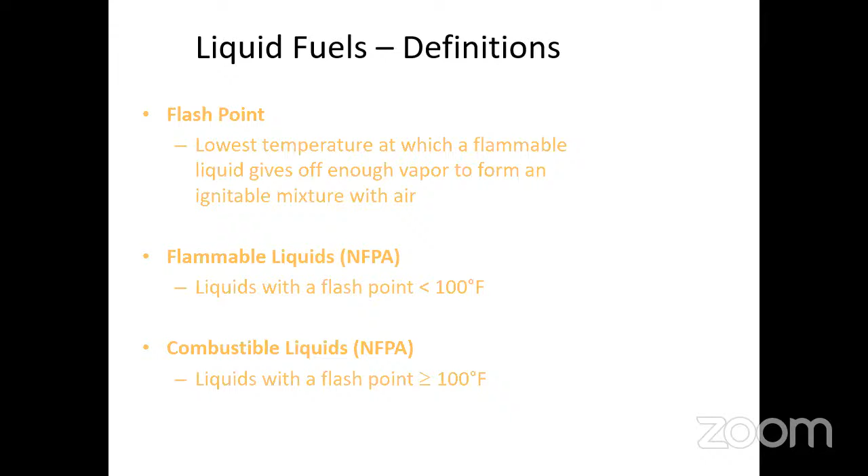Now, flammable or explosion limit is always there. It is the range of composition of material in air which will burn, that is the upper flammability limit and also the lower flammability limit. Similarly for explosion, there is a higher explosive limit and also the lower explosive limit. For any vapor-air mixture or explosive mixture, two things are required: upper flammability limit, lower flammability limit, higher explosive limit and lower explosive limit.

So for measuring this limit for a vapor-air mixture, known concentrations are placed in a closed vessel apparatus, and then ignition is attempted to measure the upper limit and lower limit. This limit also depends upon a number of parameters, but I was not interested to go into this.

The flammability limit is usually the range of composition of a flammable vapor and air where combustion occurs. This is the lower flammable limit and upper flammable limit. Beyond this limit, too little fuel is available, so it will not burn. And if you cross the upper flammable limit, then too much fuel is there, not enough oxidizing material to burn it. So between the upper and lower flammable limit, if a mixture is there, there is a possibility of burning, a possibility of catching fire if ignition is there.

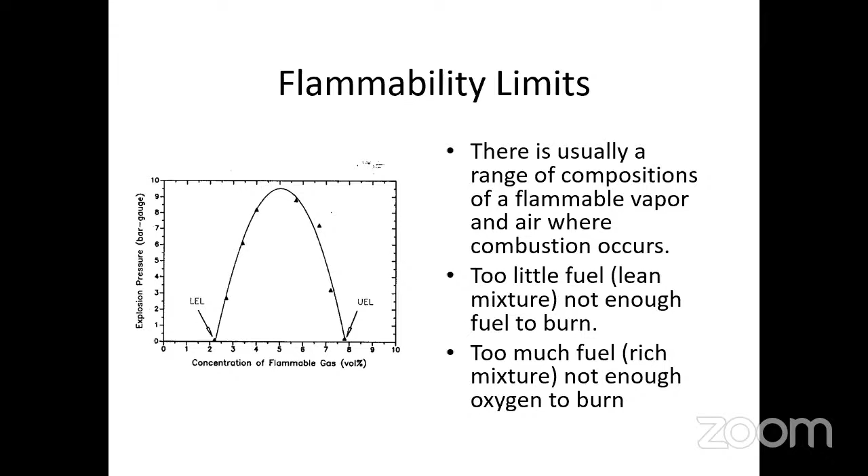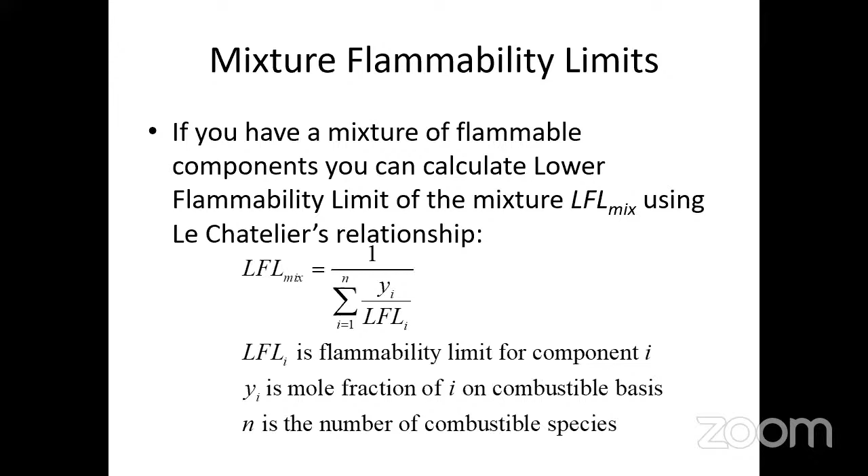For a flammable mixture, we can calculate the upper flammability limit and lower flammability limit for a mixture. Yi is the mole fraction of the ith combustible species, and n is the number of combustible species present in the system. So we can calculate the upper flammability limit as well as the lower flammability limit using these equations.

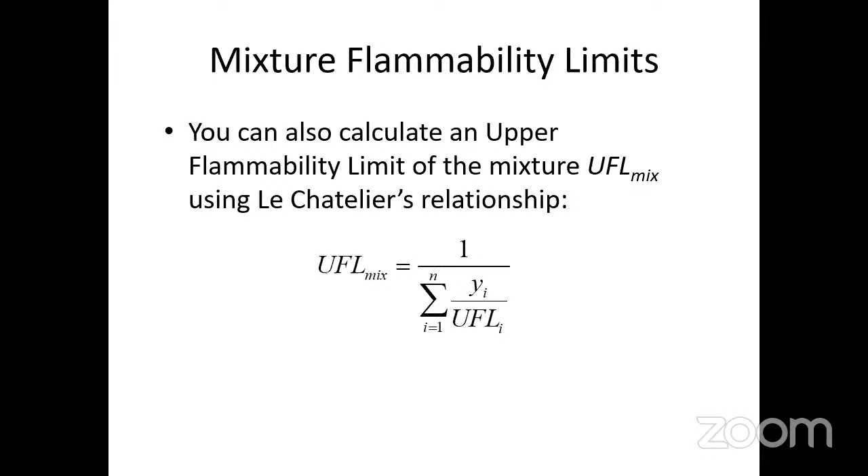Flammability limit also changes with pressure. The effect of pressure is also there, but the lower flammability limit does not get affected by pressure, while the higher flammability limit does have an effect of pressure.

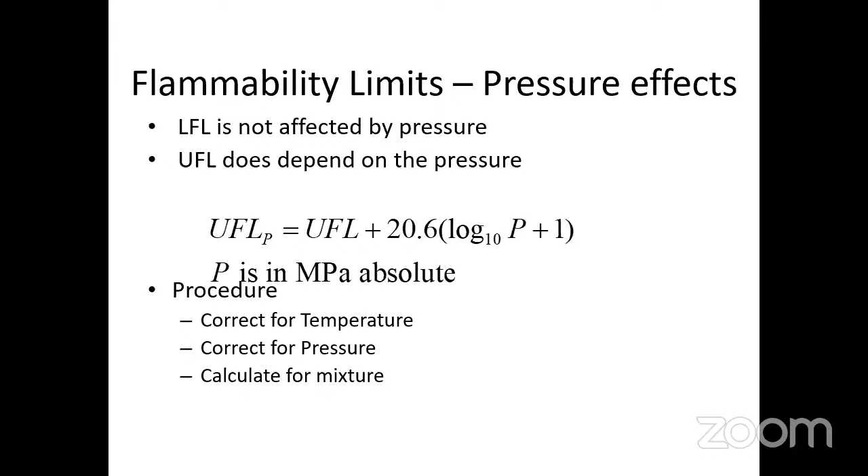Another important parameter is minimum oxygen concentration. The lower flammability limit is based on air, but actually it is oxygen that is important. Often in industry, they inert to dilute oxygen concentration, and below the minimum oxygen concentration, the reaction cannot generate enough energy to heat the entire mixture, so the self-propagation reaction cannot occur. So minimum oxygen requirement is another important parameter for continuous fire.

Another important parameter is minimum ignition temperature and minimum ignition energy - the minimum energy required to initiate ignition or combustion. For most hydrocarbons, this value is very low, more or less 0.25 millijoule, whereas the spark from walking across a room is 22 millijoule. We always assume an ignition source will exist, but minimum ignition energy is required for ignition. Textbooks give the minimum ignition energy in tabular form.

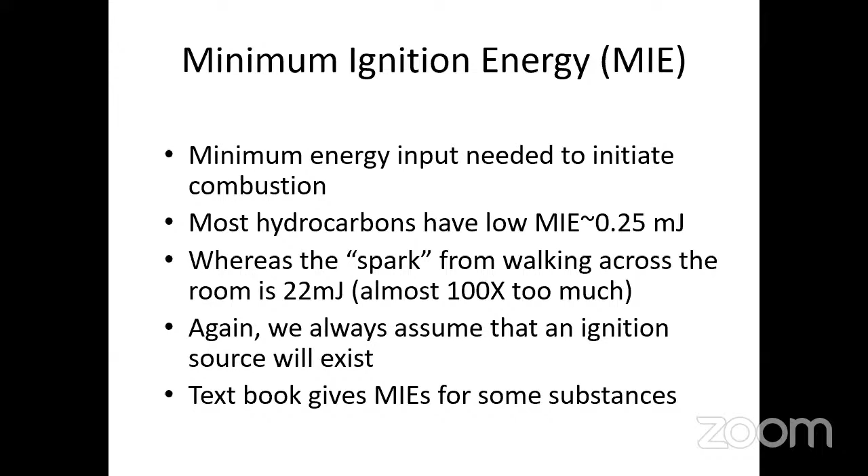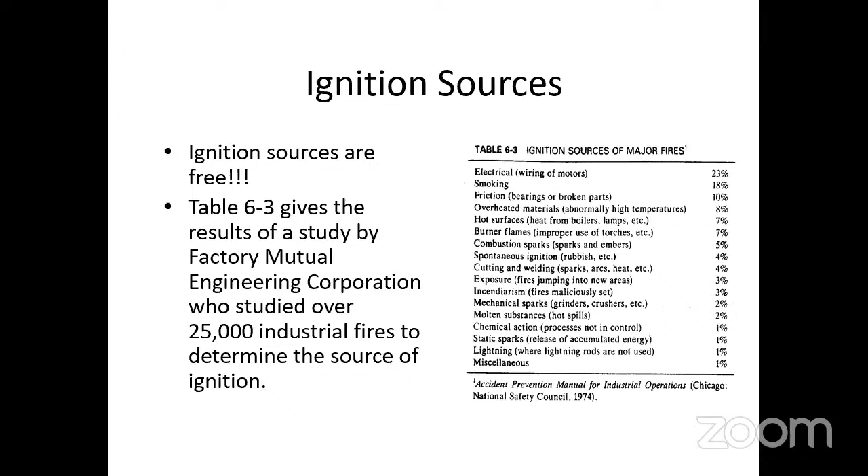So there is an ignition source - I already told you the ignition sources are there. This table gives the ignition source, taken from the accident prevention manual for industrial operation.

The flammable limit changes in the presence of inerts in the system. It changes according to the temperature of the system, and also the flammability limit changes with the pressure in the system. So in the case of fire, the flammability limit changes with the presence of inert material, with temperature, and with pressure.

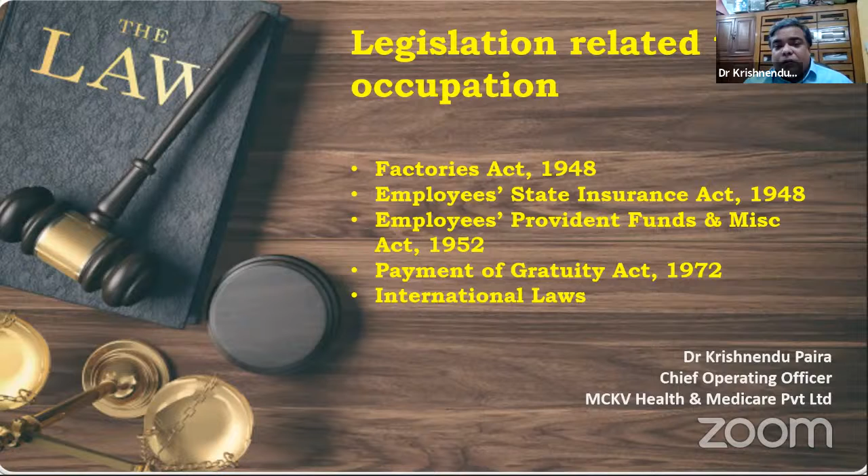The next thing is that there are specific raw materials, some products which are called hazardous material or hazardous process. So what are hazardous processes? Sorry, I forgot to mention one thing - young person. Who is considered a young person? It means a person who is either a child or an adolescent will be considered as a young person. So this is the definition for adult, adolescent, child, and young person.

What about hazardous processes? It means any process in relation to an industry specified in the first schedule where, unless special care is taken, raw materials used therein or effluents would cause material impairment of health or result in pollution of the general environment.

What is power? Power means electrical energy or any other form of energy which is mechanically transmitted and is not generated by human or animal agency.

Next, prime mover. What is prime mover? Prime mover means any engine, motor, or other appliance which generates or otherwise provides power - this will be considered as prime mover.